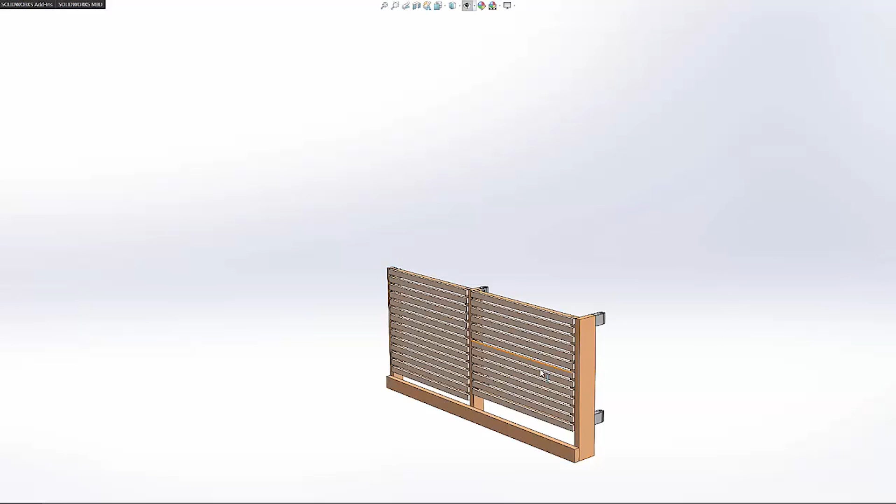And so you can see I've overlaid the CAD model on this image here, and so we can zoom in on that and we can get rid of those gates because they're just basically box frames with horizontal slats, so there's nothing really fancy going on there. Once we get rid of the gates, you can see the actual frame, and surprisingly the frame's not all that complicated either. There's a long 2x4 that runs along the bottom, tying in all of the vertical posts, and there are 3 vertical posts. The 2 on the left hand side are just 2x4s that are upright, and on the far right hand side it's just a 2x6 that's upright because the glass partitions are offset a little bit.

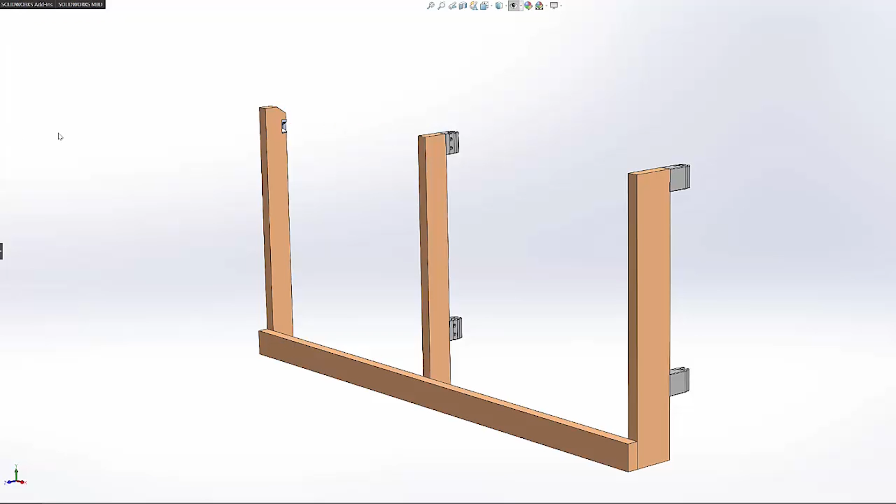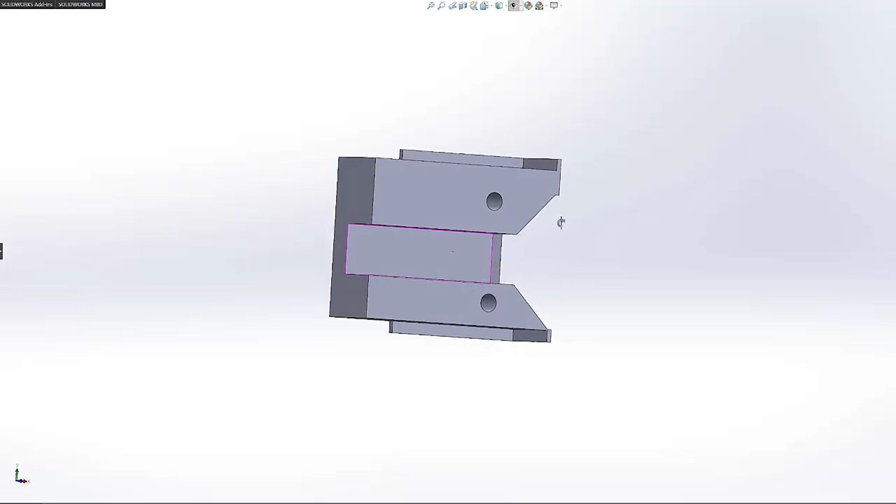Getting rid of those, we can take a look at the actual 3D printed parts. So I'm actually clamping to the glass partitions on either side of the staircase with these custom 3D printed glass clamps. Now they just screw together with some M6 screws, and there's some rubber on the inside that grips onto the glass. And on the far end there's an oddly shaped mount here that clamps onto the railing mount to secure that far post into place.

And so I'm going to begin by pre-assembling my glass clamps, and so each glass clamp has 2 brass heat set inserts meant for M6 screws, and these inserts press into place using a generic soldering iron, and the plastic will melt around the knurled surface and give those M6 screws some extra tear out strength. In the recessed rectangular area, I'm going to be taking some rubber strips and I'm going to be super gluing those into place, and the rubber strips will provide some extra friction so the glass clamps will firmly grasp onto the glass partitions.

With the general plan in place, it was time to get to work, so I cut my vertical post 36 inches high, and this is the same height as a standard baby gate that I measured from, and my vertical posts are just made from select pine that I found at my local Home Depot. I used my router to round off the corners so there's no sharp corners for the child to hit their head or face on, and then I started marking out the center of the post to where I can mount my 3D printed clamps for the glass.

So I'm marking my centers here, and I'm just going to be screwing those clamps directly into that wood. There's going to be one at the very top of the post that's going to sit flush with the top post, because there shouldn't be anything sticking up on top of the post for anything like clothing or string or rope to get stuck on so a child could accidentally strangle themselves. And so each glass clamp simply mounts with 2 number 8 screws into the narrow face of the 2x4.

With the top clamps mounted, I'm able to get the vertical posts in place and start marking out the location for the bottom clamps so that they do not interfere with the first step of the staircase. Then I was able to mount my lower glass clamps to the posts, make sure the posts are plumb, and then tighten them down and clamp them to those glass partitions.

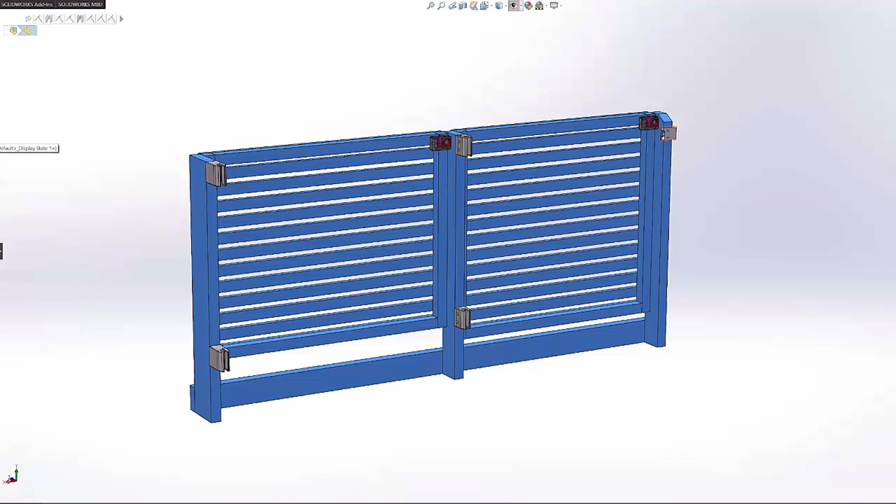Additionally, on the center post and the far left post that attaches to the railing, I'm going to have to router out a pocket for the striker plate that the gate latches engage with. And so I designed my own safety latches, and we are going to be 3D printing those and assembling those later on. We'll take a closer look at those later, but right now we'll just take a quick look at the striker plates that we are going to be installing into these posts.

Installing the striker plates is pretty similar to mortising out the posts for the hinges. And so the first thing I would do is mark their location and trace out the striker plate. Then the next thing to do would be to remove the majority of the material with the router. And then you can come in and remove the corners with a chisel. And finally install the actual striker plates with the 2 countersunk screws. These are just going to be number 8 screws that are designed to fit into the striker plates and mount them to the posts.

Then I can bring my vertical posts back to the horizontal cross member and clamp them into the correct position. I'm going to be using the pocket holes with the appropriate pocket screws to screw them into the horizontal cross member. First, I'm going to check that they are perfectly perpendicular, and I'm going to have to pull the whole thing away from the staircase because I've positioned the pocket holes to be in the least visible sides of those vertical posts. And then I can get the whole assembly pushed back into place and install my 3D printed railing clamp. And this railing clamp eliminates the need for me to anchor this vertical post into the wall so I don't have to screw into my drywall.

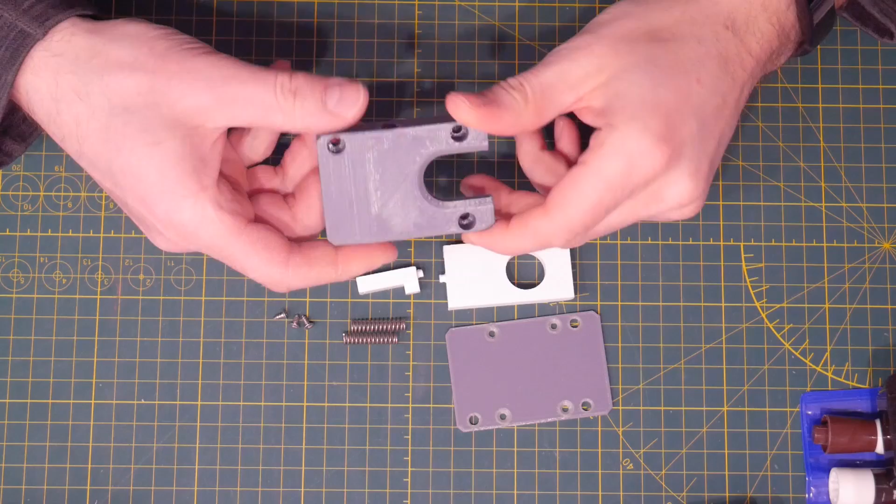So now we can take a little break from the woodworking portion of this build and we can assemble the 3D printed safety latch that I designed. So the main body there is in my hand, and I'm going to take these two springs and I'm going to be installing these first into the main body.

So the first spring slips into the recess through the top hole and it sits in that pocket, and the second spring sits in the pocket perpendicular to that on the inside. Now we can take our button, this is the top button, and it slides in through the top through that square looking keyhole, and there's a circular boss that engages with that first spring and keeps it into place.

Next we can take our bolt with that funky looking geometry on the front, and that's going to control how the latch behaves when we push and pull those buttons, and so it's going to slide into place. Again, there's another circular boss that engages with that perpendicular spring. But before we can get it into place, we got to take our top button and push it down.

This part's a little tricky, so I'm going to grab a screwdriver and I'm going to push the little rectangular tab on the front. I'm going to use that to push it all the way down until I can get that bolt engaged, and you can see it snap into place there, and that allows the whole assembly to snap into the retracted position. So at that point now I can take my four number 4 by 1/4 inch long screws and I can put the back plate on.

And so I designed the operation of the safety latch to require some finger strength and dexterity that I thought a small child or infant wouldn't have. So in order to open the gate, you got to press the top button and pull in on that bolt. And in order to release it, you can just simply press the top button and the springs will release it.